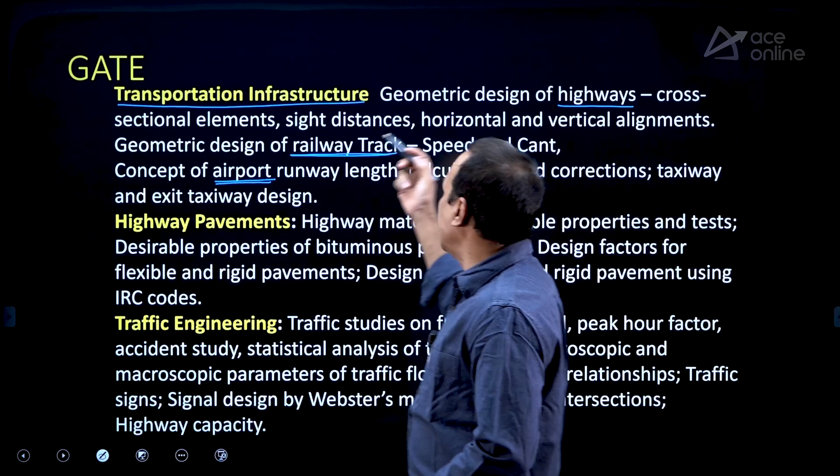For GATE, this is our syllabus. You have transportation infrastructure, mainly highways. This is highway geometric design, and along with it you have railway geometric design and airport geometric design. So the geometric design of highway, railway, and airport. After that, pavement design along with properties of highway material.

Next is traffic engineering. So totally you can say there are 3 parts.

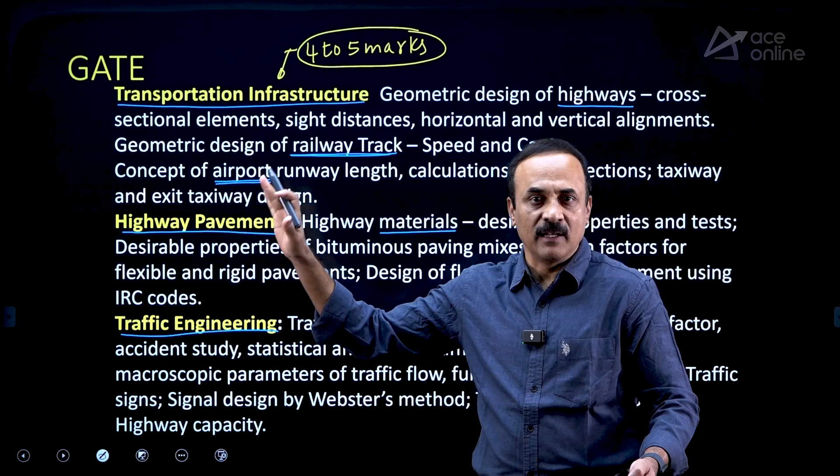There may be a chance of 4 to 5 marks from highway geometric design, including railway plus airport. Generally, if a question comes from railway, there is no chance of a question from airport, and if a question comes from airport, there is no chance of a question from railway, till now. In future, there may be a chance of a question from both railway and airport along with highway, but in railway and airport you only have the geometric design part, which is very simple, sweet and short. So no need to worry much about it.

Next, highway pavements will have a chance of 2 to 4 marks here.

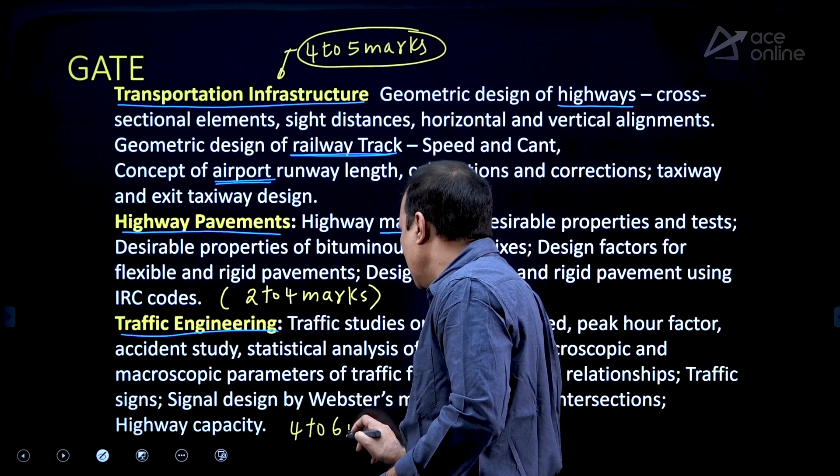Traffic engineering is having again 4 to 6 marks, sometimes it may go up to 6 also. Minimum is 4, you can go up to 6 marks also. So compared to geometric design, there is a slight higher weightage for traffic engineering.

Be careful about traffic engineering because it has a lot of miscellaneous theory things and empirical parameters also. You have to be very careful and cautious about traffic engineering, so spend more time on it. Highway geometric design is straightforward and formula oriented; if you know the formula and a little of the specifications, that is more than enough. So spend more time on traffic engineering first, then come back to highway geometric design including railway and airport, then come to pavement design and highway material.

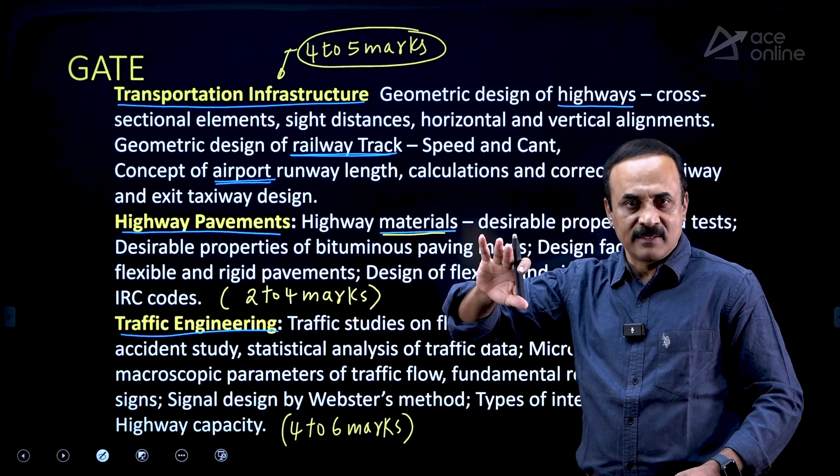In pavement design and highway material, there is less weightage, from 2 to 4 marks. Especially in highway material, you just need to go through material testing, especially aggregate testing and bitumen testing. If you remember the aim, apparatus, and specifications, that is more than enough. No need to go through the procedure of the experiments and all.

Now, coming to the type of questions, you all know there are multiple choice questions, MCQs. For MCQ, if there is a wrong answer, 1/3 is negative. For a 1 mark question, 1/3 is the negative mark. For a 2 marks question, 2 into 1/3, that is 2/3, is negative.

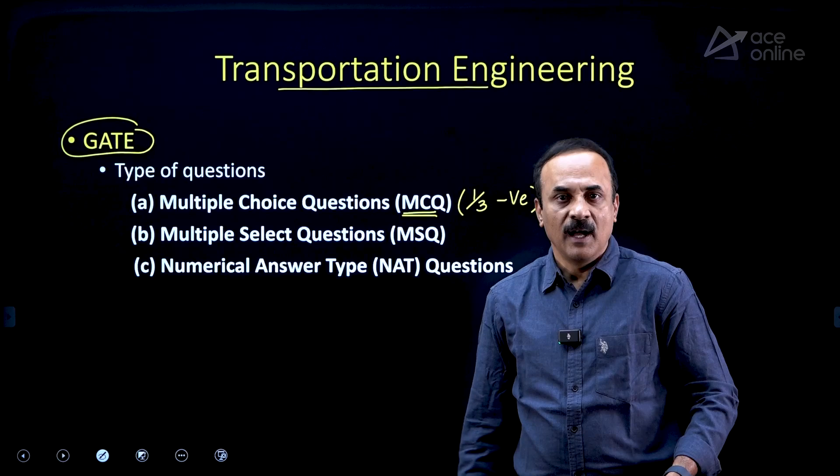Multiple select questions will also be there, very similar to multiple choice questions, but here more than one option may be correct. You can select more than one option among A, B, C, D. So there is no negative marking here. And for numerical answer type questions, you need to fill the answer in numerical form only, meaning there is no choice at all. You need to fill the answer as per their requirement.

Sometimes they will ask you to round it to the nearest integer, sometimes to 1 decimal place, 2 decimal places, and so on. But if there is answer variation, they will accept correctness within some range. There is no negative marking here, that is the advantage. So you must answer all the multiple select and numerical answer type questions.

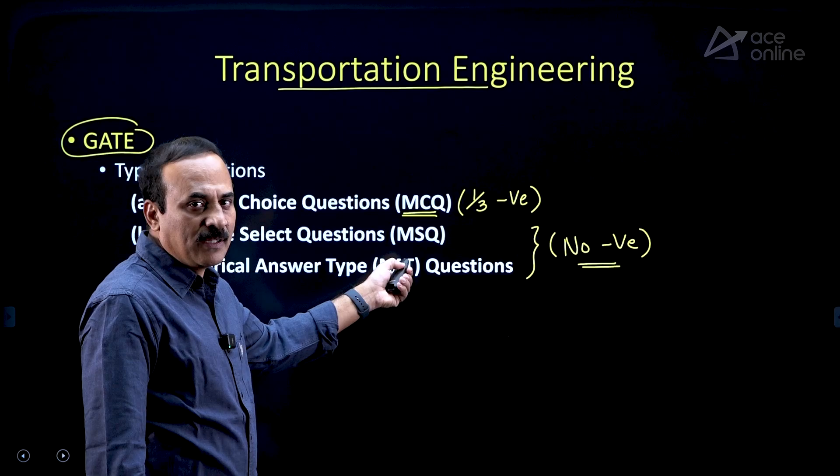Nowadays, the importance of multiple select questions is increasing. 3 years back there were no multiple select questions, but recently they have added multiple select questions in the GATE exam also. Usually, these are the types of questions we expect in the GATE exam.

Memory recall type questions, meaning based on formulas and specifications, as given by the GATE officials on the official website. That means there will be some memory oriented questions based upon formulas and specifications. So you must memorize and write the formulae along with the specifications, some specifications like what is the reaction time, what is the height of the driver above the road surface, like that.

Comprehensive ability to understand - if you understand the concept, they may give you theoretical questions or numerical aptitude type questions, because GATE is a graduate aptitude test. So few questions are based upon aptitude also. A person with good aptitude can answer the question without much difficulty. That type of question is a comprehensive question.

Application type - whatever theory or formula you have come across, you can apply that formula and get the answers. That may be a formula substitution type, and there may be analysis type questions also, where you need to analyze the question, think, and then answer.

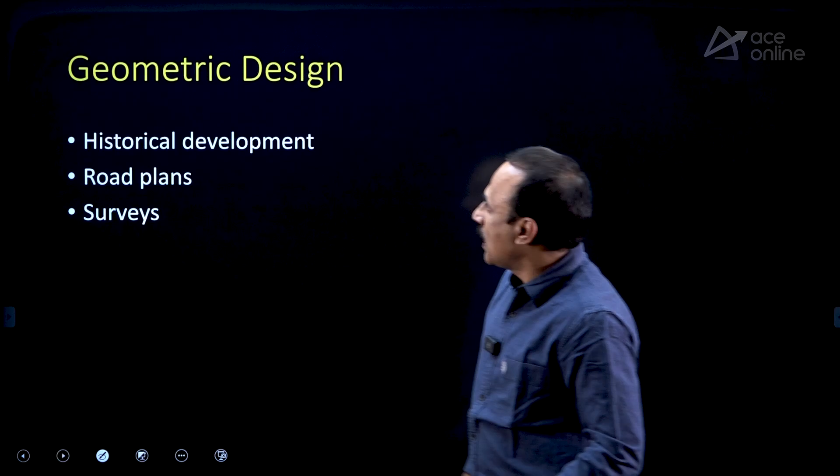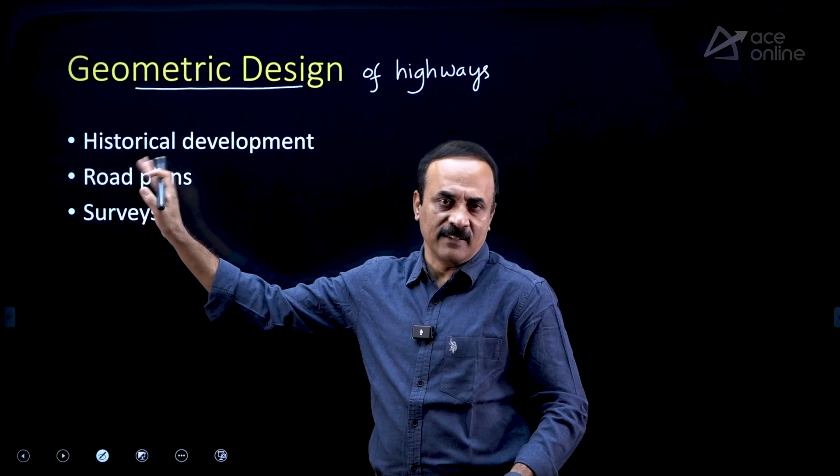Now come to geometric design. Geometric design includes geometric design of highways, historical development, road plans and surveys. I don't think questions will come from this area - you can directly ignore these, because history never repeats, and road plans and that type of old version material - nobody will ask you, since GATE is a graduate aptitude test.

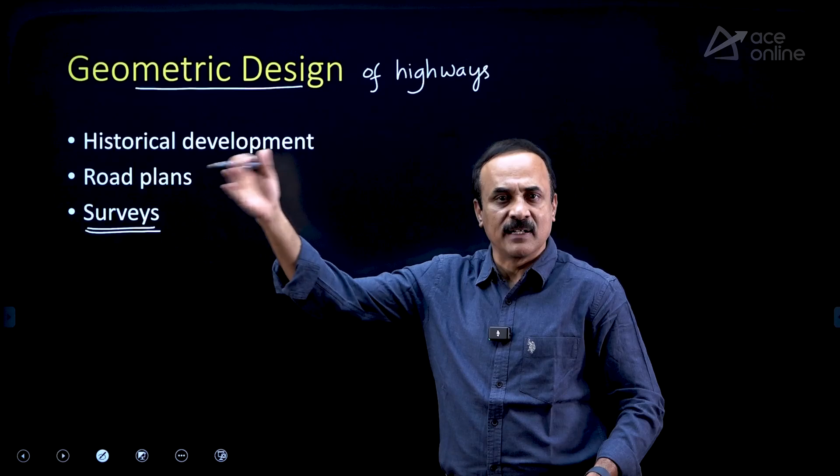Nobody will ask you all these things. But surveys you might have come across in the survey subject - that is more than enough. In survey, you might have come across surveys related to highways, surveys related to buildings, surveys related to canals. If you have a little idea there, that is more than enough.

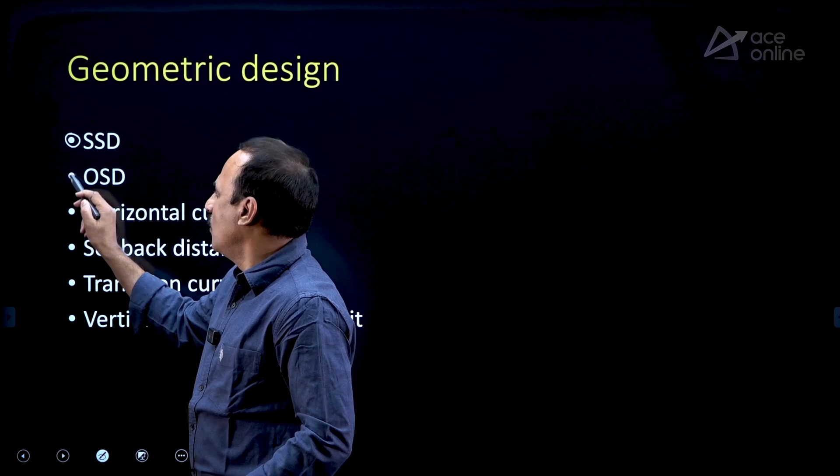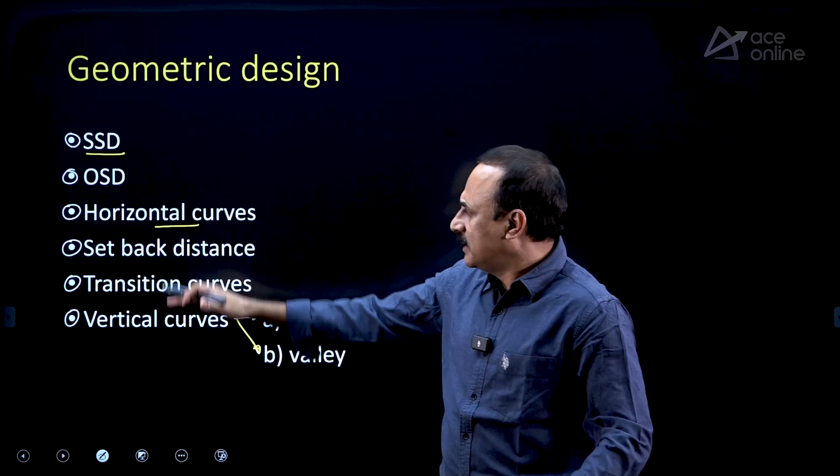Now coming to the main things of geometric design - you have stopping sight distance, overtaking sight distance, horizontal curves, setback, transition curves, vertical curves. In vertical curves there are 2 types - summit and valley. There's a scope of 4 to 5 marks from this. Stopping sight distance is important, overtaking is okay, horizontal curves is important. Other areas may have questions, but each chapter will have 3-4 formulae, sometimes 1 or 2. So do not neglect any part of this geometric design of highways topic - SSD, OSD, horizontal curve, setback distance, transition, vertical curves with summit and valley - that is enough.

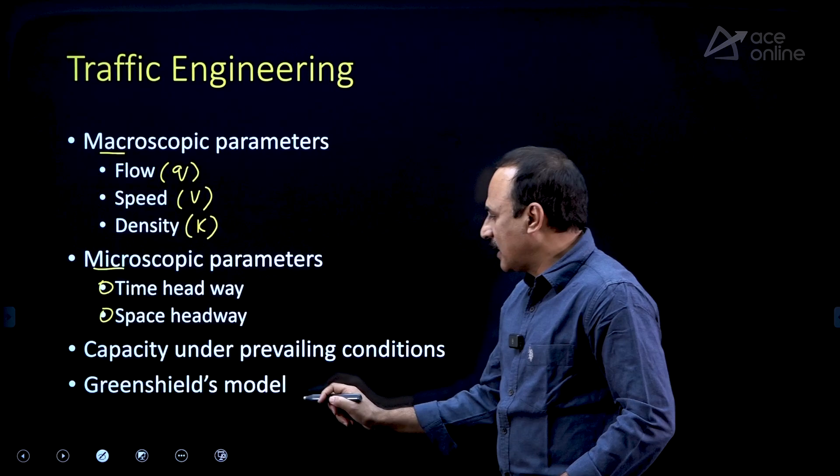Next is traffic engineering. We have macroscopic parameters like flow - nothing but traffic volume, speed and density - and the relation between these values is important, especially capacity calculation based on these values. Next is microscopic parameters like time headway, space headway. Micro means small, macro means big or large parameters. Capacity under prevailing conditions is important. Then the Greenshields method is very important - the Greenshields linear speed-density model - questions are repeatedly coming from Greenshields.

Next is speed and delay studies - I don't think questions will come from this, you can ignore it if you want. Point of conflicts is a theory, memory-oriented area. Then design of rotary intersection - rarely questions come. Highway lighting also very rare, parking also very rare, accidents also a rare area.

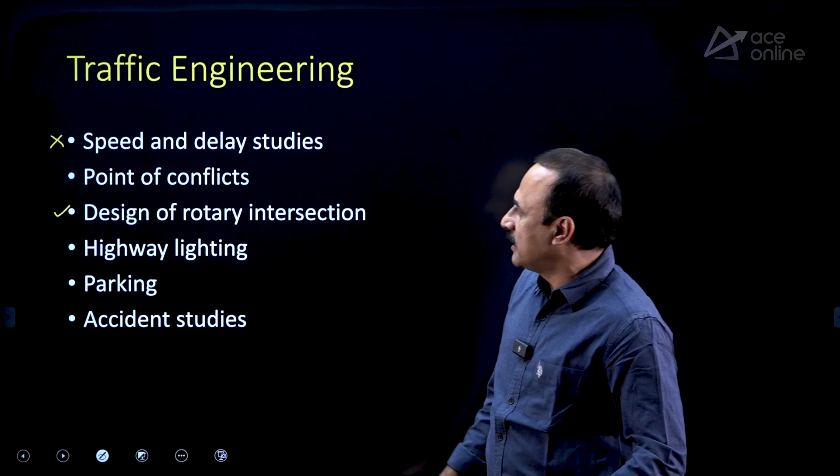So these are the important areas, other things are not that much important. In this area, design of rotary may come into the picture, and point of conflicts theory - try to remember that. Other things are rare to get in the exam.

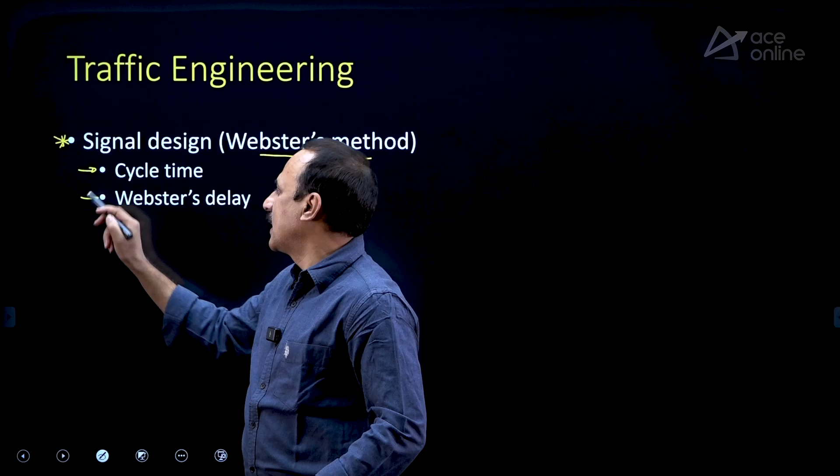Now next, signal design - Webster's method is very important, especially cycle time calculation and Webster's delay calculations. We will just talk about these things.

As per our limited time, we will just overview all the things.

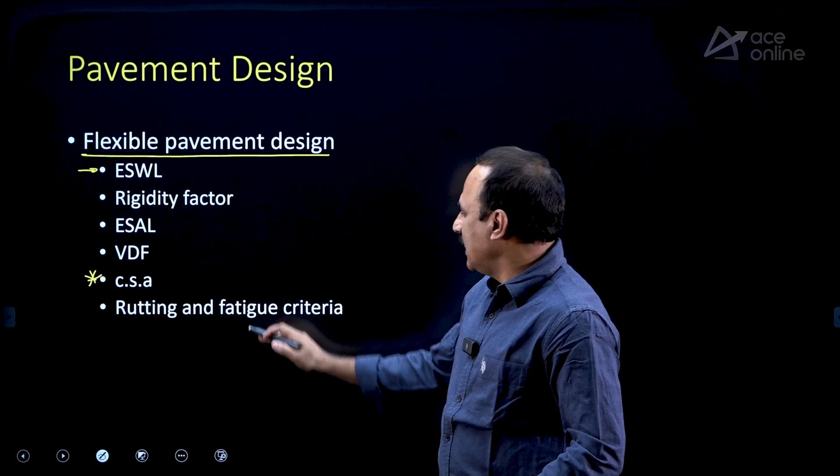Next, coming to pavement design, we have flexible pavement design. This includes calculation of equivalent single wheel loads, rigidity factor calculation, equivalent single axle load, vehicle damage factor, and cumulative standard axle calculation, which is very important for us. Next is rutting and fatigue criteria, which is a rare issue.

Next, rigid pavement design: we have wheel load stresses, warping stresses, and frictional stresses. Frictional stress calculation is important, and a critical combination of stress is important, especially in joints. We have longitudinal joint, expansion joints and contraction joints. Among these, dowel bar design and tie bar design are important. Go through these areas.

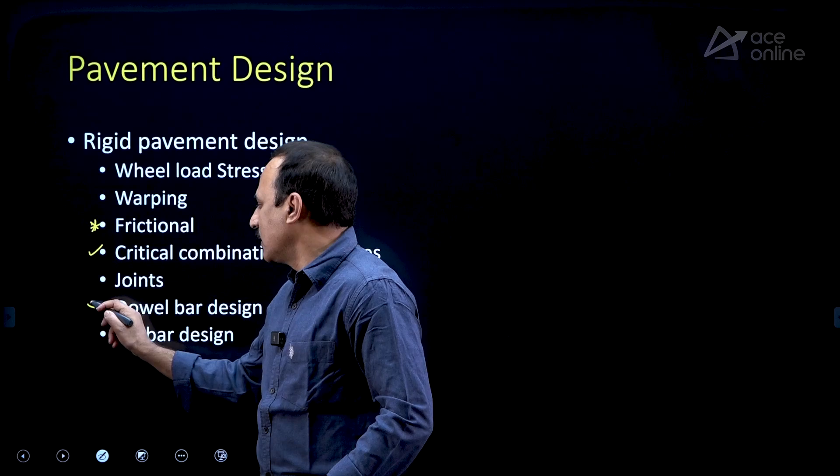Critical combination of stresses, go through this. Summer midday, winter midday, like that we have different combinations as per IRC. Try to remember as per IRC.

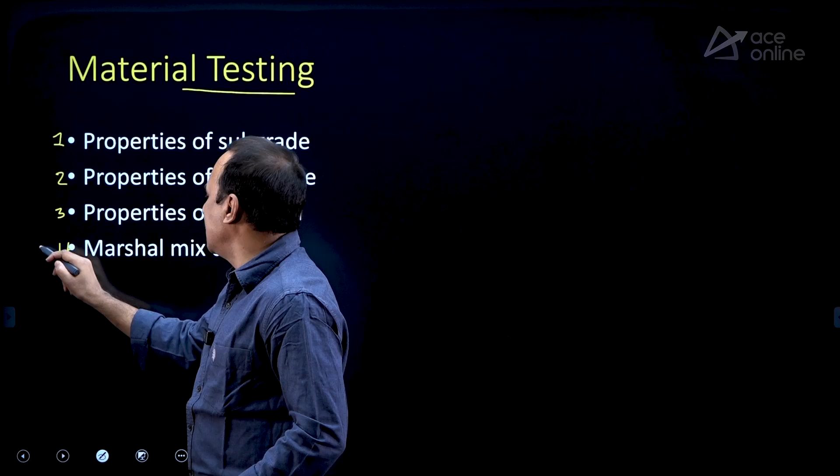Next is material testing. We have properties of subgrade, properties of aggregate, properties of bitumen, and Marshall mix design method, which is important for us. There is a chance of a 2 marks numerical question from Marshall bituminous concrete mix design.

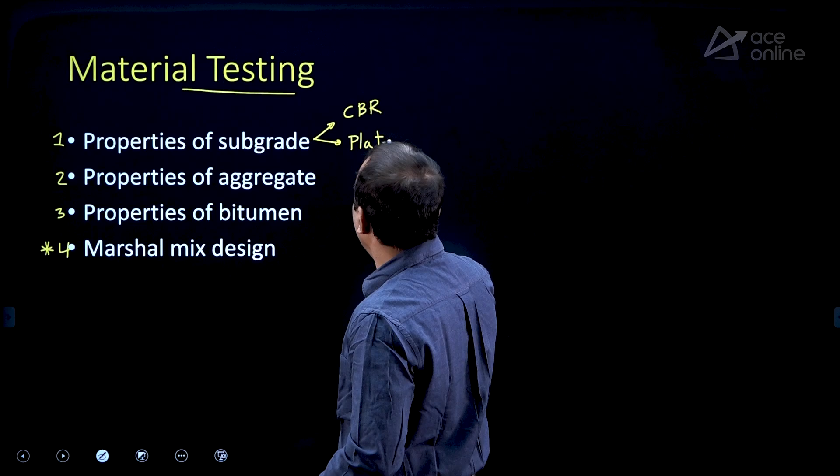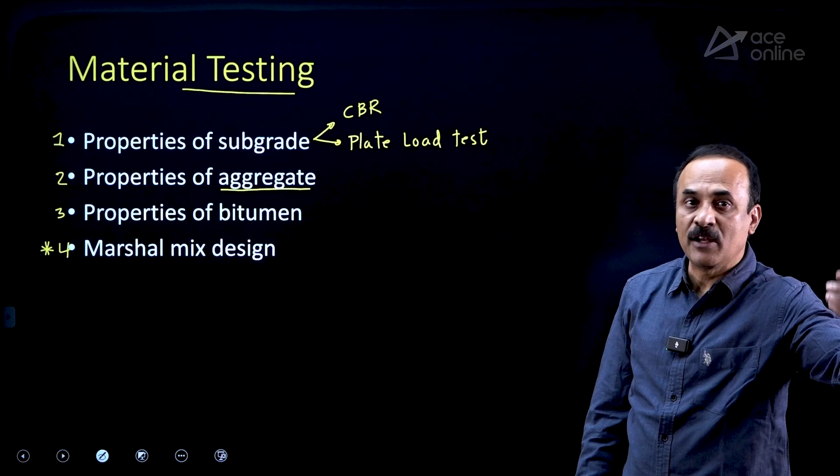Properties of subgrade includes CBR test and plate load test. Go through these: CBR test, plate load test, properties of aggregate and properties of bitumen. The properties of aggregate will be helpful in construction aggregate also. Especially, you might have come across in RCC where you have cement, aggregate and water. That aggregate and this aggregate, road aggregate and building aggregate, construction aggregate, are the same.

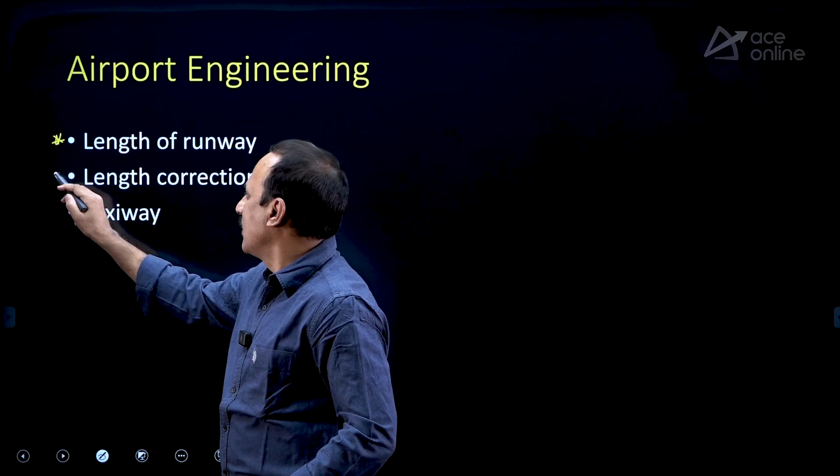Length of runway in airport, length of runway, length corrections, and the taxiway, especially the exit radius of taxiway, is important for us. Exit radius calculations are important from the exam point of view.

Now we will just touch the geometric design part. Gradient is slope along the length of the road; camber is slope across the length of the road. So there may be a chance of a question on grade compensation.

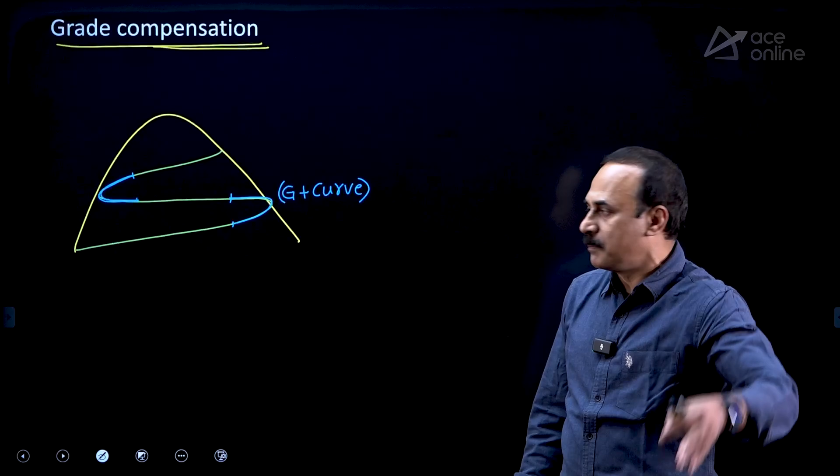Grade compensation is the reduction given to the gradient when a gradient comes along with a horizontal curve. If there is a gradient coming along with a horizontal curve, say suppose you are going on a hilly area on a straight road, but at some locations a gradient comes along with the horizontal curve. The road is going up and up and it is taking a turn. So you have gradient plus horizontal curve. If gradient is there plus curve is there, then heavy vehicles may not go up.

To facilitate heavy vehicles to go up easily, we reduce the gradient. That reduction given to the gradient is called grade compensation. Grade compensation in percentage is given by 30 plus R by R, or 75 by R, whichever is least. This is an empirical formula. R is equal to radius; you need to substitute R in meter only, don't substitute in any other units. The units are fixed.

And the compensated gradient is the gradient that you are providing on the road after grade compensation. This is nothing but the original gradient minus grade compensation. Compensated gradient is equal to the actual gradient on the road minus grade compensation.

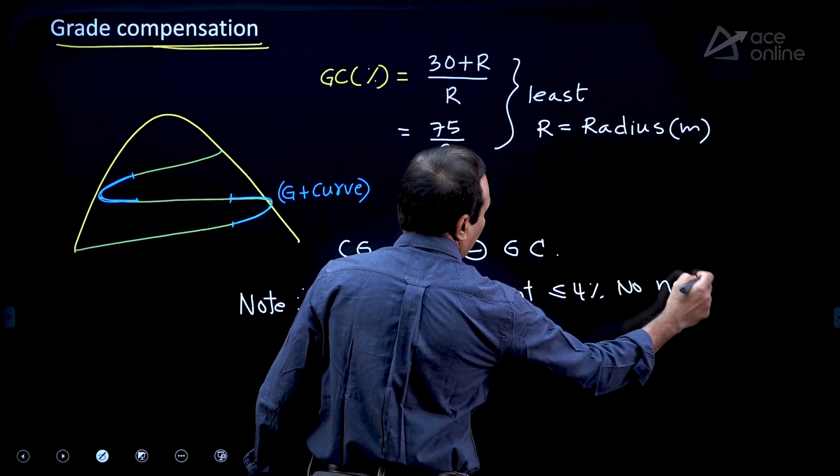And what IRC says is, if the gradient is less than or equal to 4%, there is no need of grade compensation. No need to give a discount to the gradient if the gradient is flatter than 4%. So you need to remember this formula and remember this point also.

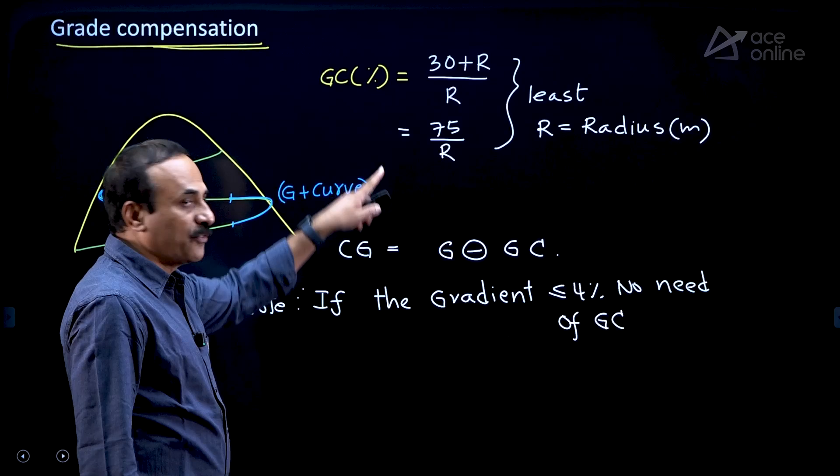We'll take a small numerical on this concept. Try this question: the gradient on a highway is 5%, and the highway encounters a horizontal curve of radius 500 meter. Which of the following statements are correct? Grade compensation is 0.15%. Compensated gradient is 4%. Grade compensation is 1%. Which of the following statements are correct? It is a multiple select question.

Try this question please. The gradient given is 5%, which is more than 4, so grade compensation is allowed. You can allow the grade compensation. What is the allowable grade compensation you can have here?

Allowable grade compensation means if 5 is the actual gradient, you can give discount till it becomes 4. So maximum grade compensation is 1%.

Allowable grade compensation or maximum grade compensation is 1%. You calculate grade compensation as per our formula, 30 plus R by R

and 75 by R, whichever is less. As the radius is 500 meter, 30 plus 500, that is 530 by 500. And here it is 75 by 500. This will be the least.

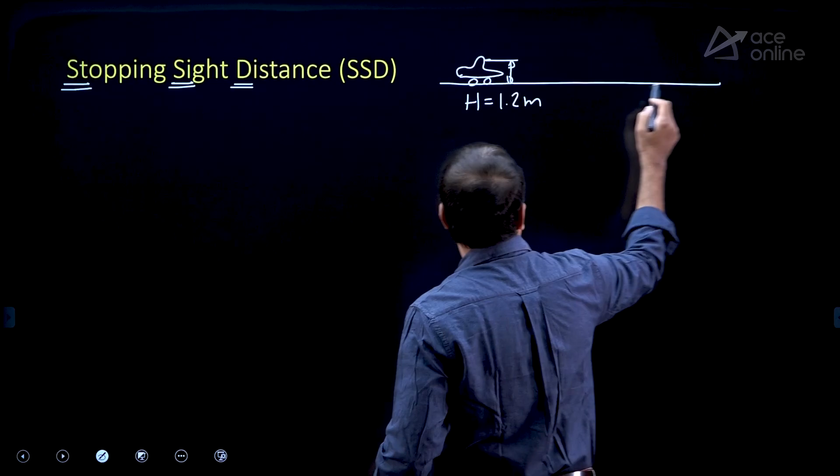The height of the driver from the road surface, we call it capital H. As per IRC, it is 1.2 meter. Minimum height of the obstruction above the road surface is 0.15 meter as per IRC. So capital H, height of the driver above the road surface, is 1.2 meter, 4 feet. Height of the obstruction over the road surface is 0.15 meter, half a feet.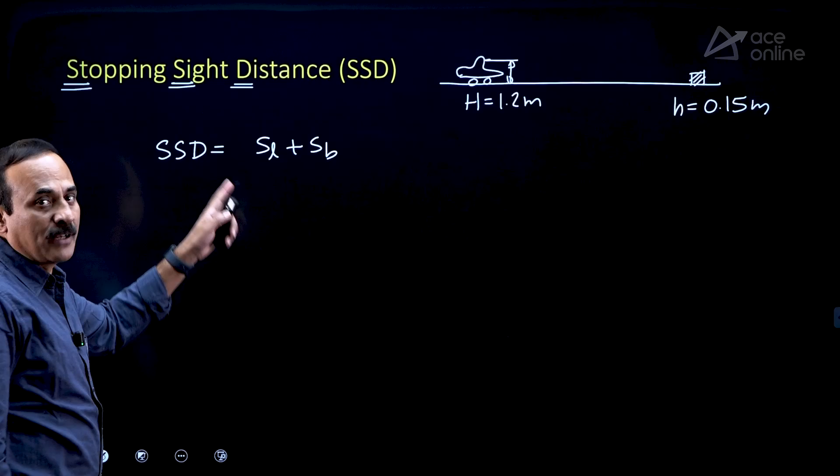So with this condition, the minimum distance required to stop the vehicle comprises lag distance plus braking distance. First, driver has to react that I should apply brake. The distance travelled by the vehicle during reaction time of driver is lag distance, and after the application of brake, vehicle moves for some distance and stops. That distance is called brake distance. Lag distance is V into T, brake distance is V square by 2GF.

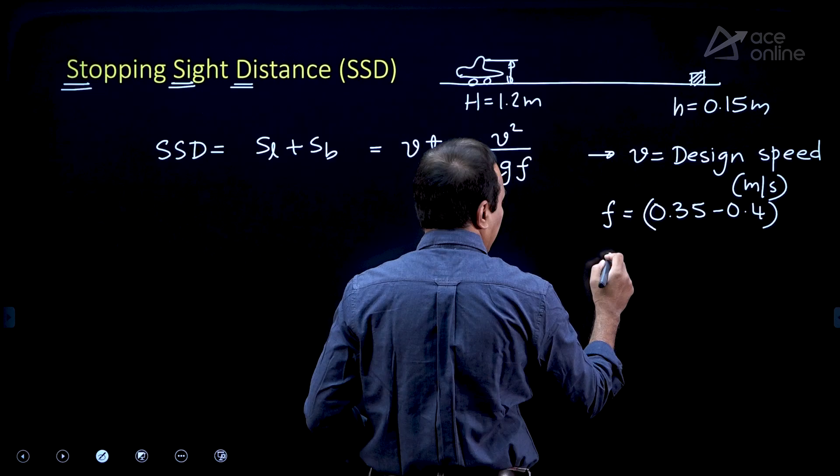Learn this by heart. V is design speed here in meter per second. Design speed in meter per second. And F is equal to coefficient of longitudinal friction, ranging from 0.35 to 0.4 as per IRC. As the speed increases, friction reduces. Coefficient of longitudinal friction, this is longitudinal friction.

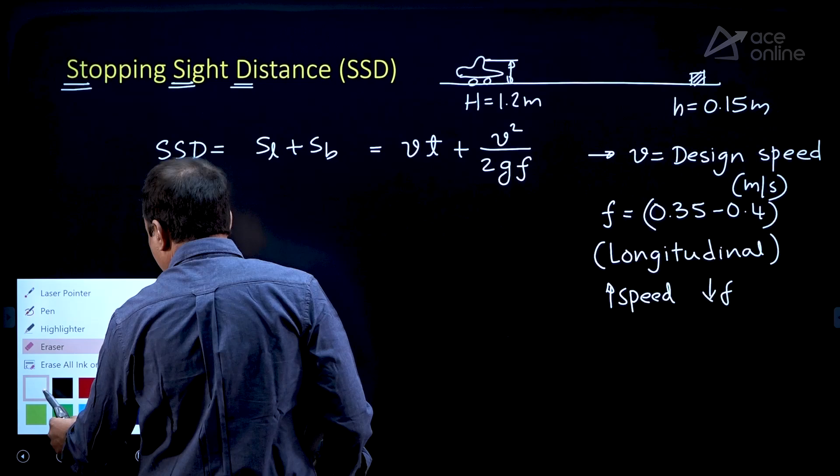More the speed, friction reduces, till the speed is 80 kmph. After 80 kmph, that means further increase in speed beyond 80 kmph, the friction remains constant. Speed increases, friction reduces up to 80 kmph. Beyond that, F remains constant.

0.35. Beyond speeds of 80, say for example 81, 83, 90, 100, 120, the friction remains 0.35. At slow speeds, the friction is 0.4. As speed increases, it reduces to 0.35. By the time speed is 80, it is 0.35. Beyond 80 kmph, at 80, 90, 100, 120, the friction remains 0.35 only.

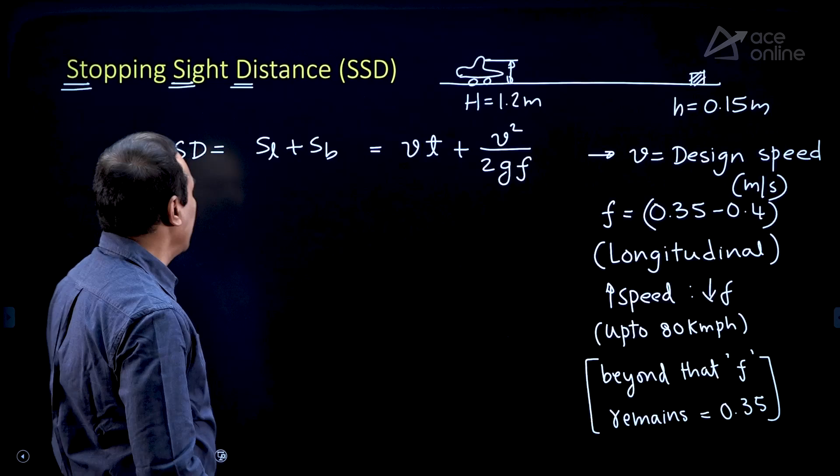So I am giving you this equation for a flat road. This is for flat road.

If the road is having gradient, plus brakes are not proper, the roads are not flat roads and brakes are not good. In that case, stopping sight distance can have no change in lag distance, but brake distance changes to V square by 2G eta f plus or minus gradient as a ratio.

Try to remember this. Eta is called brake efficiency, and G is called gradient. Both you need to substitute as a ratio. Brake efficiency you put as a ratio, gradient also you put as a ratio.

Plus indicates upward gradient, negative indicates downward gradient. Upward gradient is taken as plus, downward gradient is taken as minus. If brakes are 100% perfect, no loss at the brake, eta is 1. Perfect brakes, eta is 1. Flat road, gradient is 0.

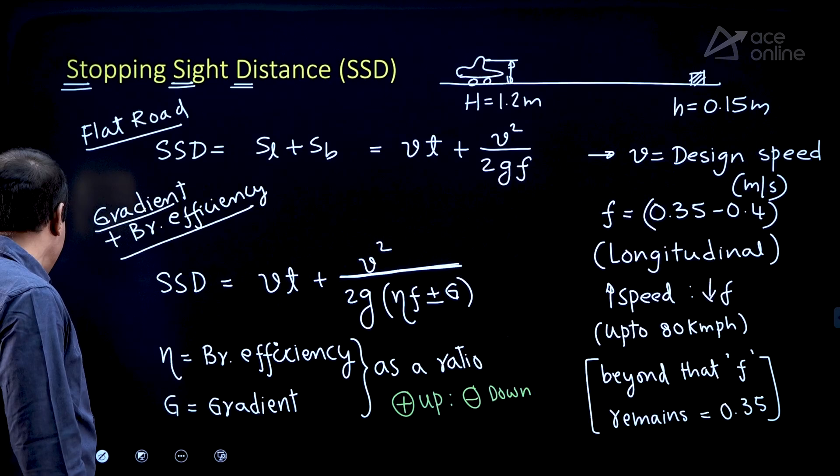If the road is very flat, gradient is 0. Perfect braking system, new vehicle, brand new vehicle brought from the showroom, eta is 1. If nothing is mentioned, take eta as 1. If nothing is mentioned, take gradient also as 0. Now, people may ask you safe SSD sometimes.

Safe SSD depends upon the number of lanes on the road and direction of traffic, especially in single lane two-way roads. This is very important. A single lane two-way road is 3.75 meters wide, with opposite vehicles also coming. In that case, you should stop and the opposite vehicle should also stop to avoid accident. So safe SSD will be 2 into SSD, because there is no chance to go onto the shoulder sometimes, as the shoulder might be damaged.

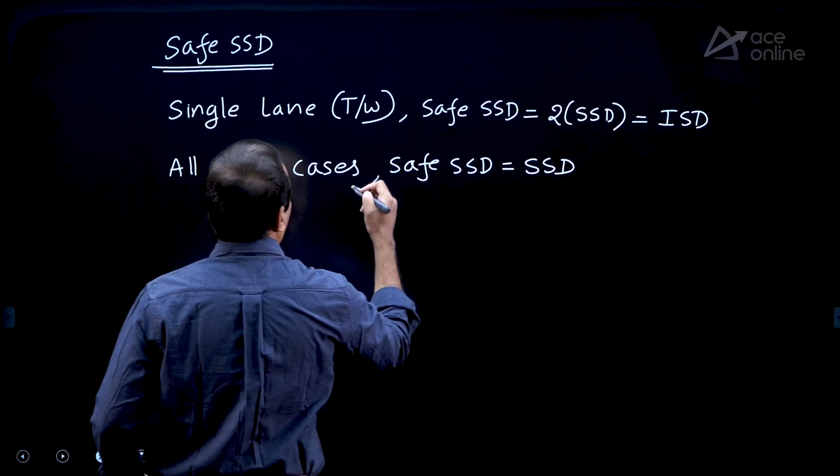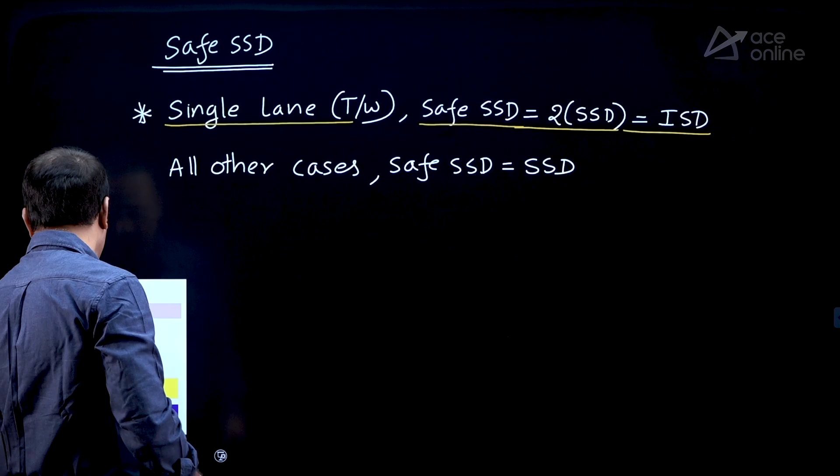So you can't use the shoulder for moving vehicles; shoulder is used for emergency parking. In that case, safe SSD is 2 into SSD, which we call intermediate sight distance. All other roads, any other case, safe SSD will be directly SSD calculated by the formula only. Try to remember this: single lane two-way road, safe SSD is 2 into SSD, that is ISD. In any other case - single lane one-way road, two lane two-way road, or any other road - safe SSD is SSD calculated from the formula directly. So intermediate carriageway, intermediate sight distance, is equal to twice the stopping sight distance.

You need to remember the relation between F and G - coefficient of longitudinal friction and retardation. A is retardation, so A is equal to F into G. A is retardation, F is the coefficient of longitudinal friction.

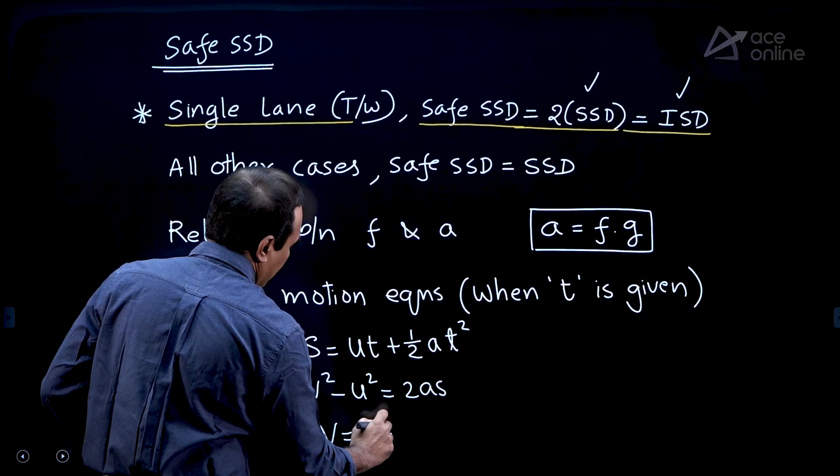You need to use linear motion equations when time of travel is given in a question. Linear motion equations are to be used when time of travel is given. You might be knowing these equations: S is equal to ut plus half at square, v square minus u square is equal to 2as, v is equal to u plus at. You might have come across these in your first year of intermediate or 11th class.

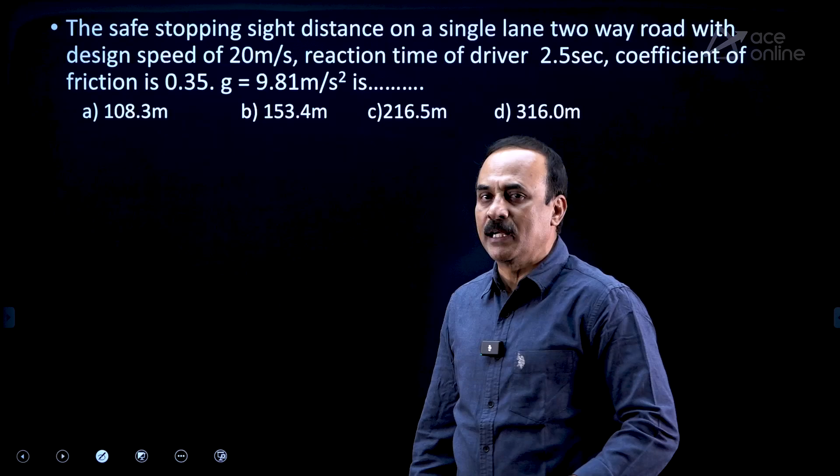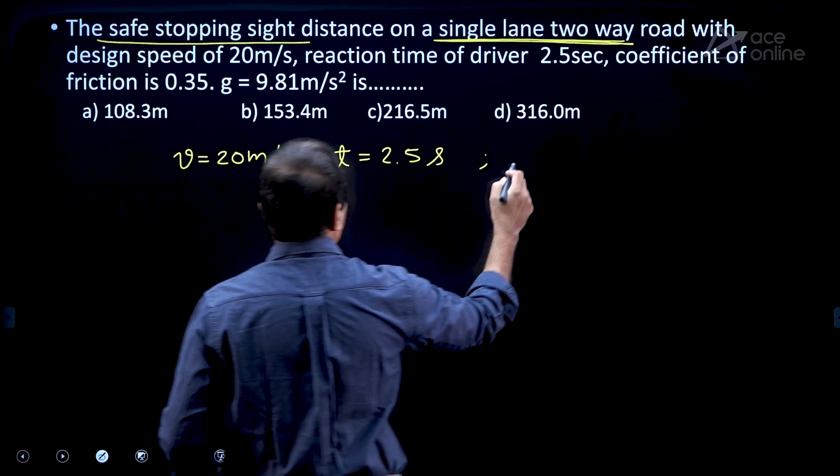Try to solve this question. If the speed is given in meters per second, you can use it directly. Otherwise, if speed is given in kmph, convert to meters per second by multiplying by 5 by 18. The safe stopping sight distance, safe SSD, is asked on a single lane two-way road - this is most crucial. Design speed is given as 20 meters per second. Reaction time of driver is 2.5 seconds. Coefficient of friction is given as 0.35 - whatever is given, you take it. G is 9.81 meters per second square.

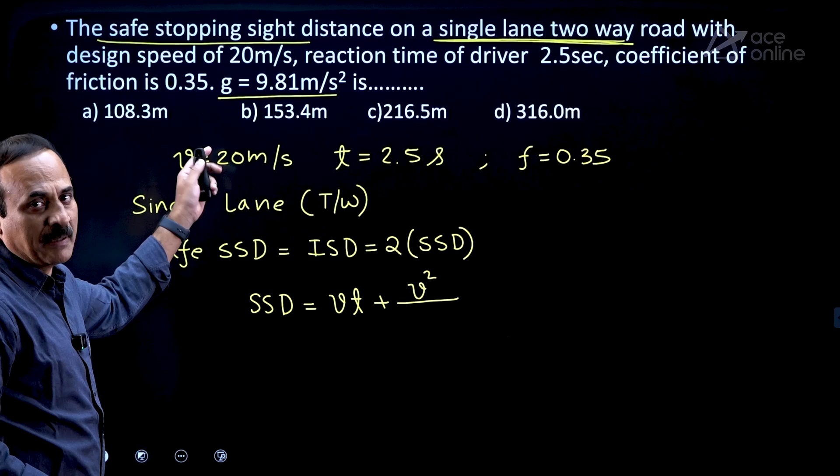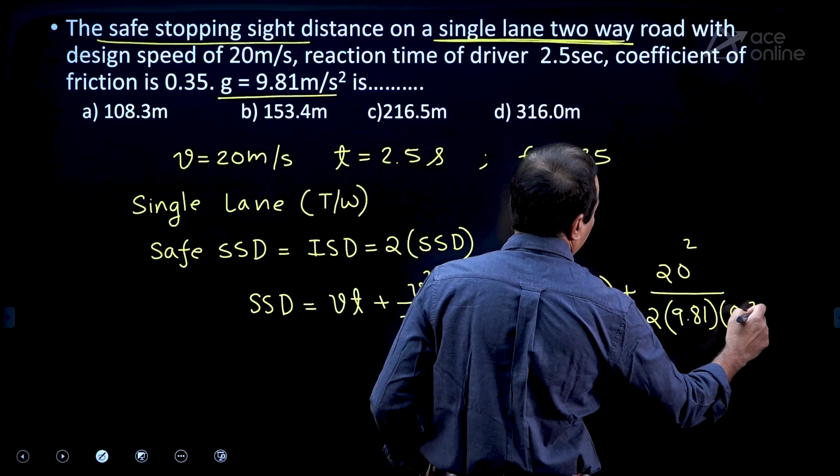Try to use the given values. So it is a single lane two-way road. Safe SSD here is ISD, nothing but 2 into SSD. SSD can be taken as lag distance plus braking distance. In braking distance, brakes are perfect because brake efficiency is not given and gradient also not given. So it is V square by 2G into F. Directly substitute, as V is given in meters per second, substitute meters per second. T is reaction time of driver in SSD, which is 2.5, given to you. Use the given values: V square, 2 into G is 9.81, F is 0.35. So 216.5 is option C.

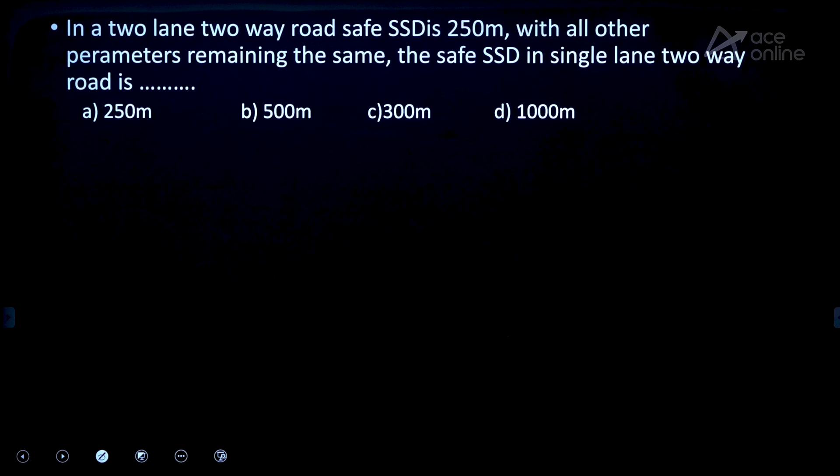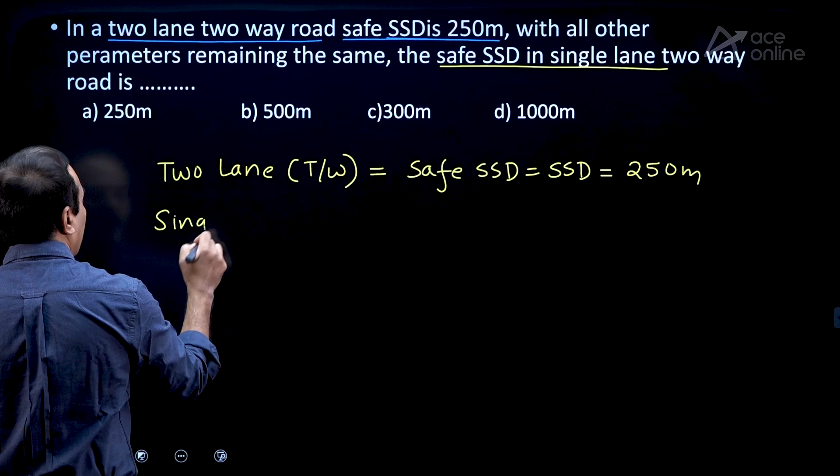Try this question. Two-lane two-way road, safe SSD is 250 meters, with all other parameters remaining the same. Safe SSD in single lane two-way road is asked. For two-lane two-way road, safe SSD is nothing but SSD only, so SSD directly is 250 meters. Then safe SSD on single lane two-way is asked - this is the most crucial part. Safe SSD is ISD actually, nothing but 2 into SSD. Already SSD is known to us, 250 into 2 is 500 meters. So the answer is option B.

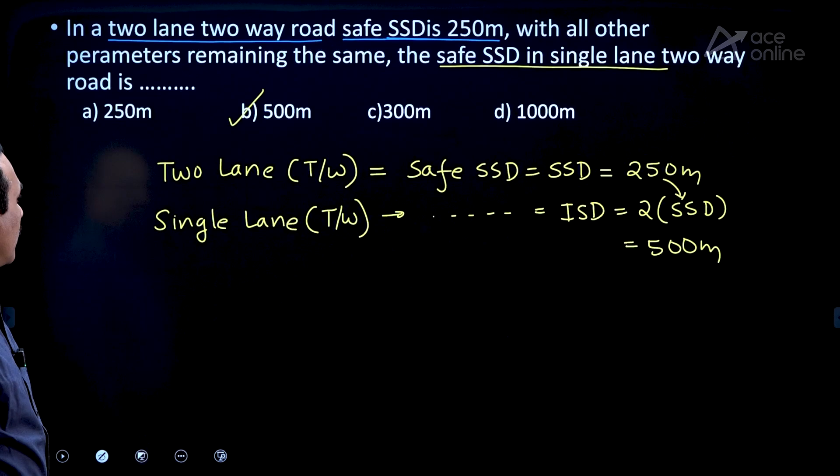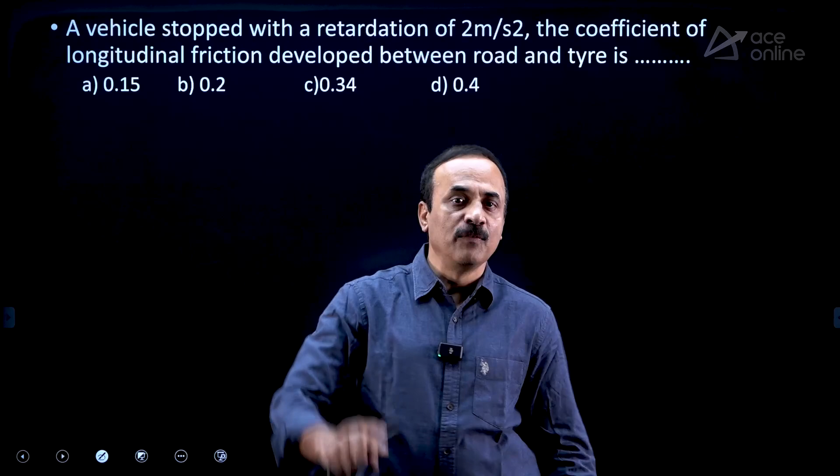Okay, like that, questions may come for 1 mark. The most critical area is single lane two-way, where safe SSD is 2 into SSD calculated by the formula.

Try this question: a vehicle stopped with a retardation of 2 meters per second square. Retardation is negative acceleration. Find the coefficient of longitudinal friction developed between road and tire - what may be the friction? Take the modulus, A is equal to F into G, that is what I told you. F is A by G, 2 by 9.81. Nearest answer, 2/10 you take it, point 2 - nearest answer is 0.2.

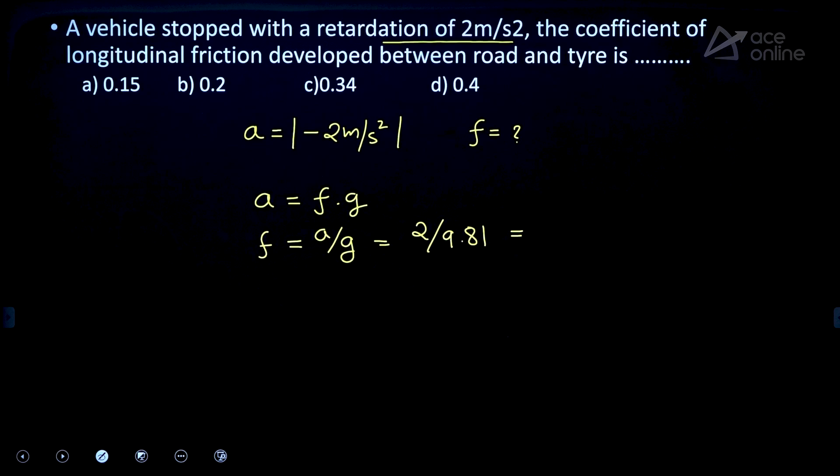One mark question generally comes like this.

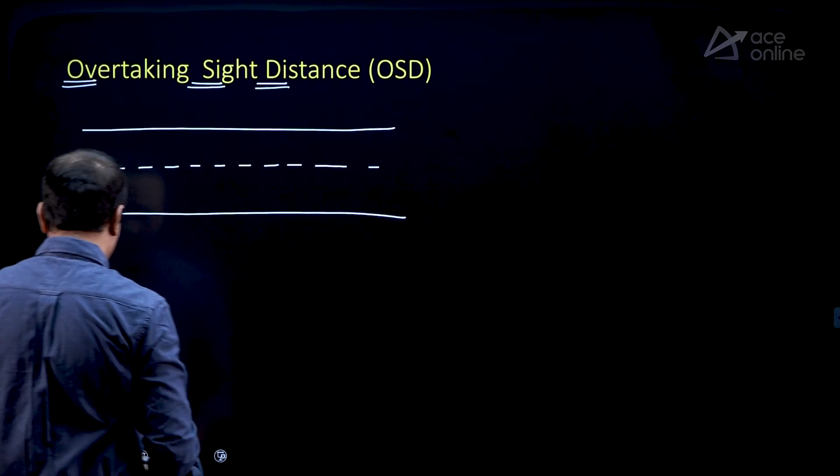We will talk about overtaking sight distance - the visible distance ahead of the driver required to safely overtake a slow vehicle. Overtaking is not allowed on single lane roads, because on a single lane road you can manage only one vehicle. So this requires a 2-lane road, minimum 2 lanes are required. Say suppose you are going by an Audi car and following a slow vehicle, a Benz lorry. Initially the Audi car driver has to follow the bench lorry at a slow speed, and has to wait for an opportunity to overtake this bench lorry.

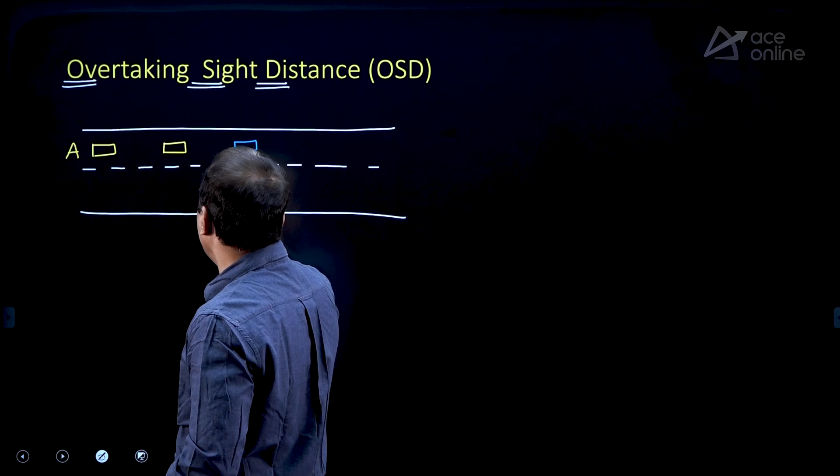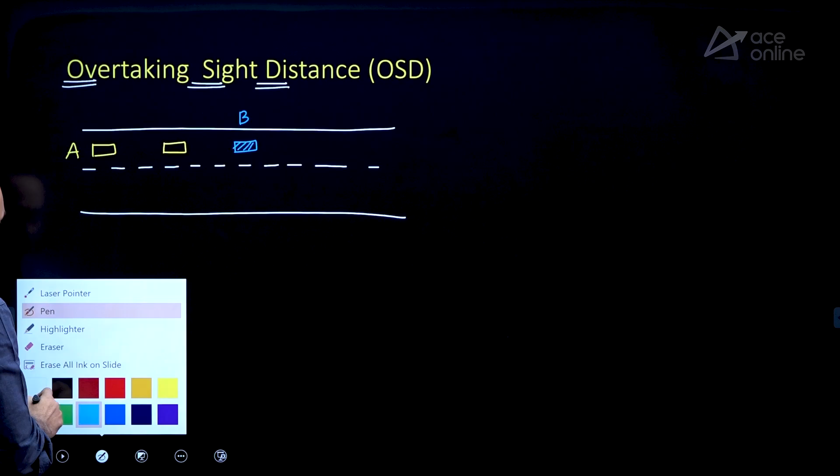So, initially the Audi car driver is following the Benz. I am taking all center to center distances. So, this is the distance travelled by the Audi car during the reaction time of the driver.

So, in this distance, the driver of the Audi car is moving with slow vehicle speed Vb. The Benz continuously moves with slow speed only, Vb. So, at this particular point, the Audi car driver moves on to the next lane. At this particular point, he observes some other vehicle coming from the opposite direction.

A Creta car is coming from the opposite direction. The Creta car is coming with a design speed from the opposite direction.

So, the driver of the Audi car identified that the Creta car is very far away. He has moved back to the original position, original lane, with increasing speed. So, during this path, the blue path, the driver of the Audi car is increasing the speed.

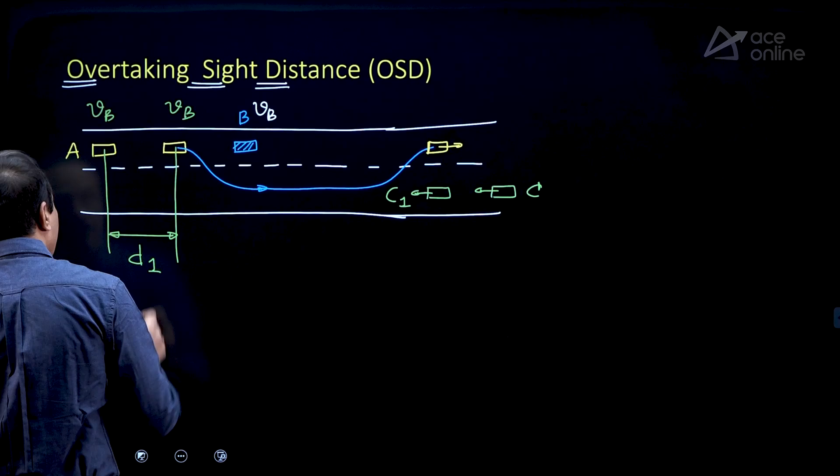So, the Creta car meanwhile has come up to here, going beyond that is dangerous. So, it has come up to here, say it has come from C to C1, and the Audi car initially during the reaction time of the driver has moved from A to A1, and then finally it has reached A2.

The Benz lorry during the overtaking time of the Audi car has moved from B to B1. It is moving like this. The Creta is coming from the opposite direction. The Audi car is moving forward like this.

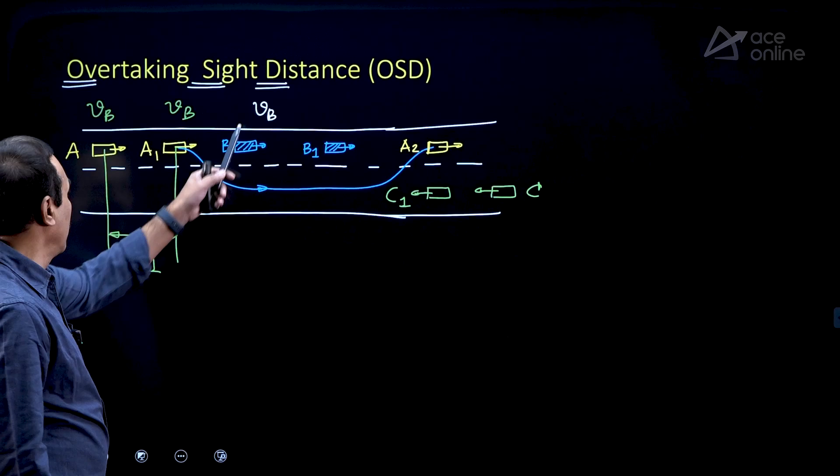So, this is the distance travelled by the bench lorry during overtaking time of capital T with a slow speed Vb. Overtaking time is capital T, reaction time is small t. The distance between the Audi car and bench lorry before overtaking is S1.

The distance between the Audi car and bench lorry after overtaking is S2. I am taking all center to center distances. So, the distance moved by the Creta coming from the opposite direction during the overtaking time, I call it D3, and the distance moved by the Audi car with acceleration is D2. So, the overall overtaking sight distance is D1 plus D2 plus D3.

For safe overtaking, in front of the driver, OSD is required, which is the sum of D1 plus D2 plus D3.

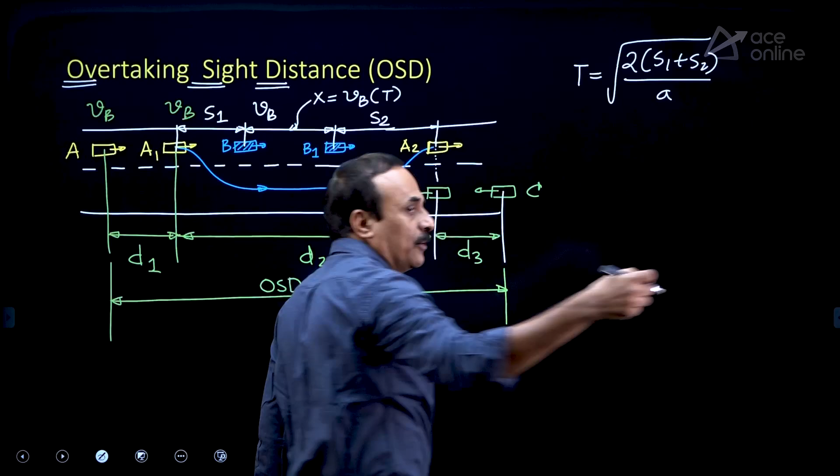Actually, the overtaking time capital T, I am not giving you the derivation, it is 2 into (S1 plus S2) by A, under root. For the derivation, you just go through the class notes. S1 is the distance between the Audi car and bench lorry before overtaking. S2 is the distance between the Audi car and bench lorry after overtaking.

If S1 and S2 are not given, use S1 equal to S2 equal to 0.7 into speed of the bench plus length of the vehicle. Average length of rigid wheelbase or average length of vehicle is taken as 6.1 meter. L is the average length of vehicle or average length of rigid wheelbase. As per IRC, we take it as 6.1 meter.

So, if not given, use this formula for calculation of S1 and S2. If not given, only use this. If given, take the given values.

Next, if you observe this data, D1 is equal to Vb into reaction time of driver in OSD. Initially, the Audi car is following the bench lorry with slow speed Vb. That is why Vb into T is D1. That is the distance travelled by the Audi car during the reaction time of the driver. T is the reaction time of driver in OSD.

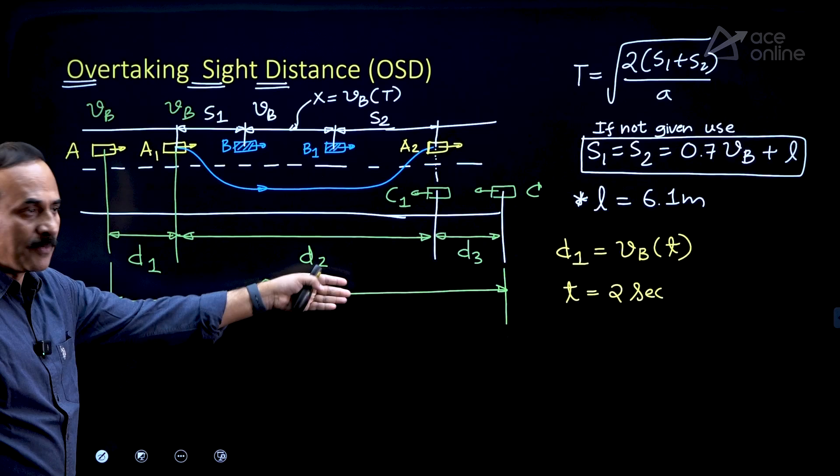It is not 2.5 seconds. 2.5 seconds is in SSD. 2 seconds is in OSD.

Now, D2 from the figure is S1 plus S2 plus Vb into capital T.

D3 is the distance moved by the Creta, which is moving with the design speed V. The Creta speed is V. It has moved a distance of D3 during overtaking time capital T. So, it is V into capital T.

So, if you remember these formulae, you can easily calculate the OSD. For the derivation and all, you need to go through the regular class notes, or otherwise it is there in any of the standard books. The derivation and all you can go through after the exam, or if you want some clarity you can go through that if you find time. Otherwise, directly memorize the formula and try to use it.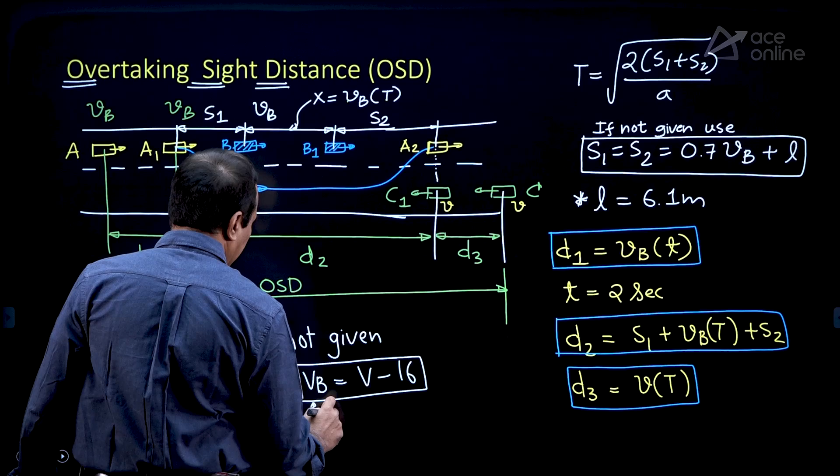If not given, velocity of the slow vehicle will be design speed minus speed 16. Try to remember it. These are all given in kmph. Capital V is generally given in kmph. Small v will be in meter per second. So, velocity of the slow vehicle is design speed minus speed 16. If Vb is not given, we use it.

Okay, this is overtaking sight distance in brief. Sometimes they will ask you safe overtaking sight distance, like a safe SSD we have taken previously. Safe OSD depends upon number of lanes and direction of traffic.

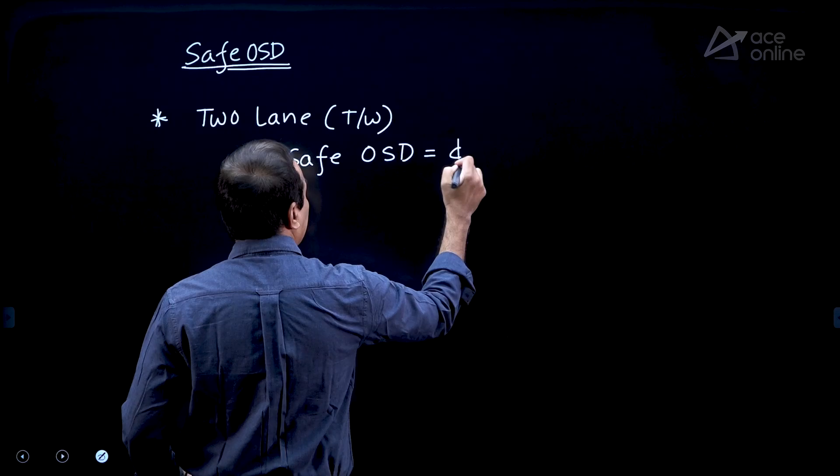Very critical is 2-lane, 2-way road. 2-lane road with 2-way traffic. Because in 2-lane, 2-way traffic, the opposite vehicle will also be coming, that also needs to be considered. So, in this case, safe OSD will be...

You need to consider D1 plus D2, and the opposite vehicle D3 also needs to be considered. In any other case, safe OSD is given differently - the opposite vehicle is not a problem at all in other cases, so D1 plus D2 only we use. Single lane roads overtaking is not allowed, that is why we use...

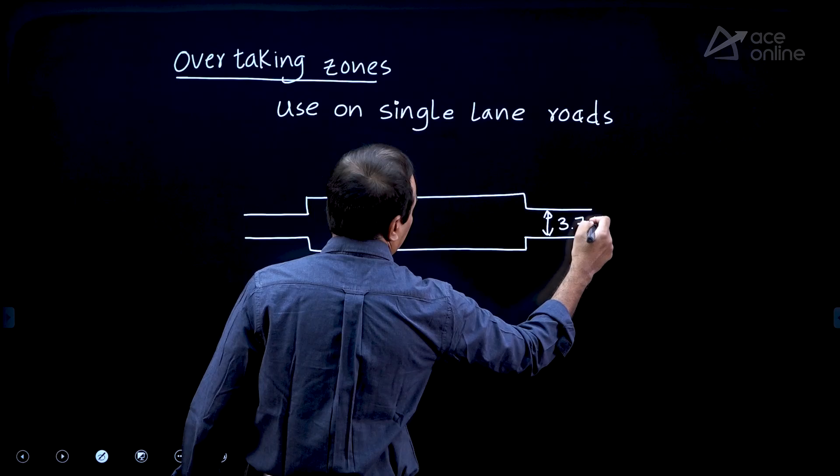Overtaking zones are used on single lane roads for overtaking purpose. That overtaking zone is nothing but a widened portion of the road for some length, only to facilitate the overtaking process. Single lane road width is 3.75 meter. In that 3.75 meter of width, overtaking is not allowed. So, in the overtaking zone, they will make the road into a double lane road.

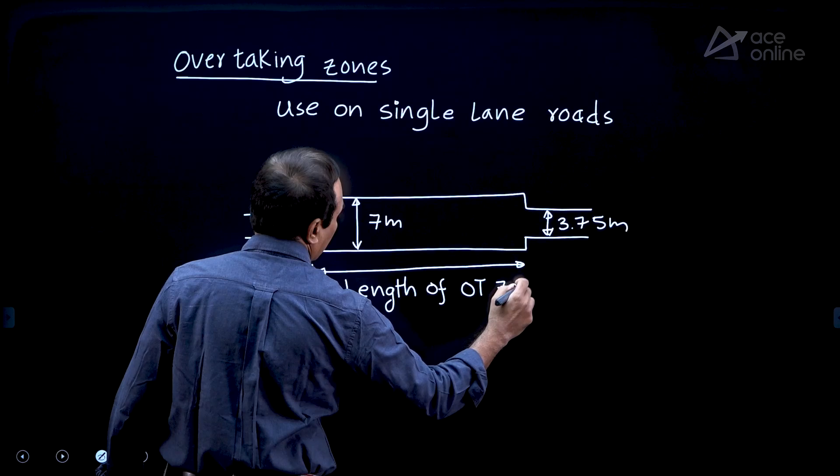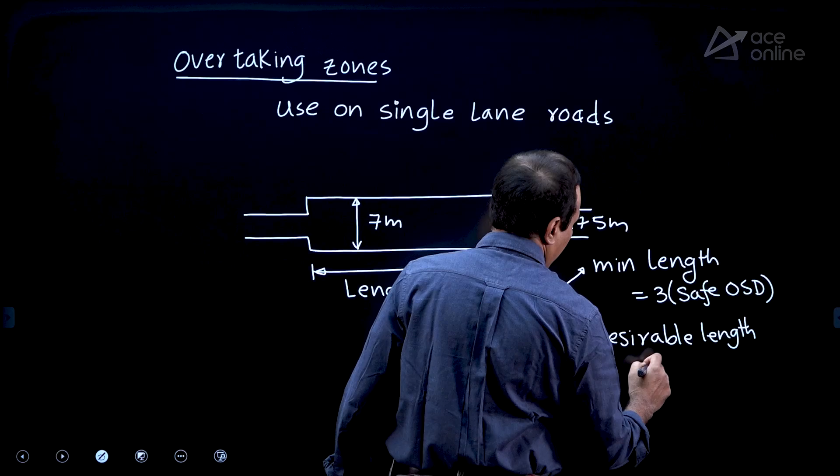So this is the length of overtaking zone. Minimum length of overtaking zone - length of OT zone I am writing, overtaking zone - minimum length required is 3 times of safe OSD. Desirable length is 5 times of safe OSD. So, minimum length of overtaking zone is 3 times of safe OSD, desirable is 5 times of safe OSD.

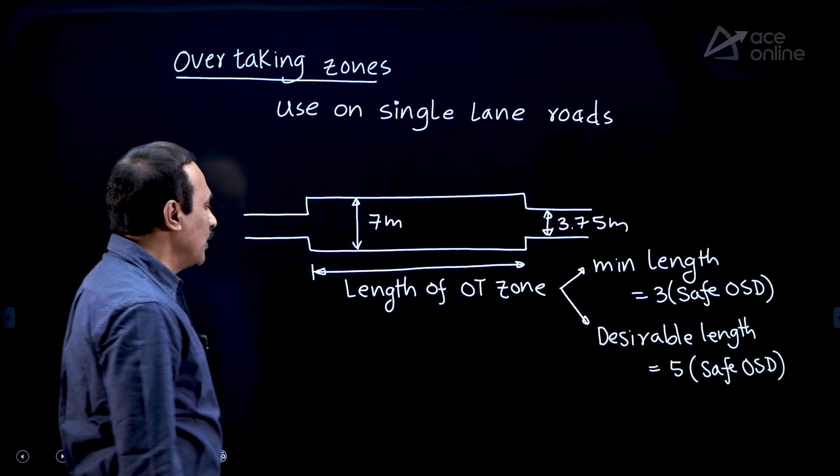And here the safe OSD is based upon the width available at the overtaking zone. Actually, width available at this overtaking zone is a 2-lane road width, 7 meter will be available. So, if you apply two-way traffic here, safe OSD is D1 plus D2 plus D3. If you consider only one-way traffic here, the safe OSD is D1 plus D2 only. D3 will not come in case of one-way road.

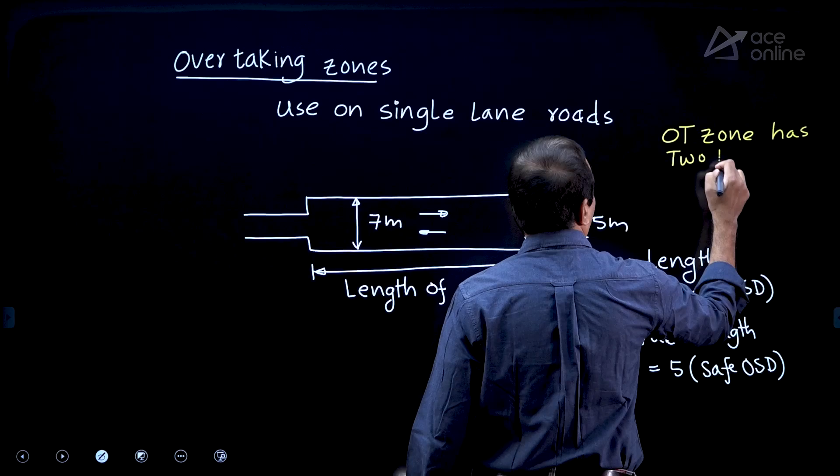So safe OSD based upon OT zone is 2 lanes. Generally, OT zone has 2 lanes. If it is one way, 2 lane one way, safe OSD is D1 plus D2 only. If it is 2 lane 2 way, if you allow 2 way here, safe OSD is D1 plus D2 plus D3. If opposite vehicle is allowed, D1 plus D2 plus D3 is required. If only one way traffic is allowed at the overtaking zone, D1 plus D2 is enough.

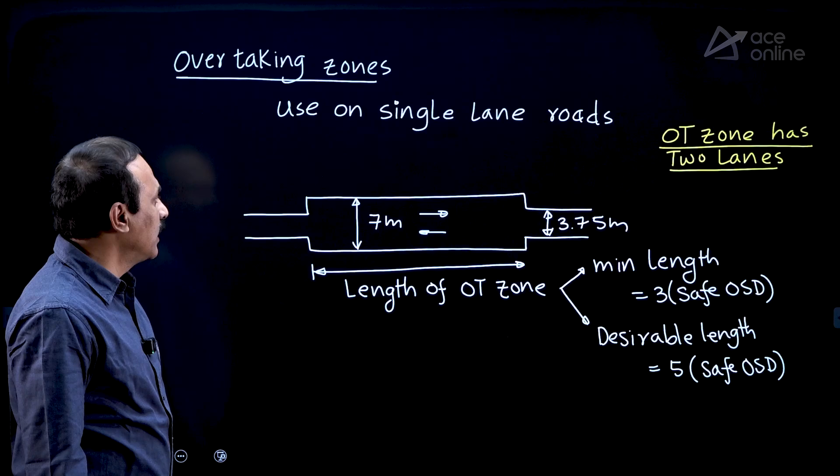Try this question - a 1 mark question, give me the answer, multiple choice question. Any doubts please?

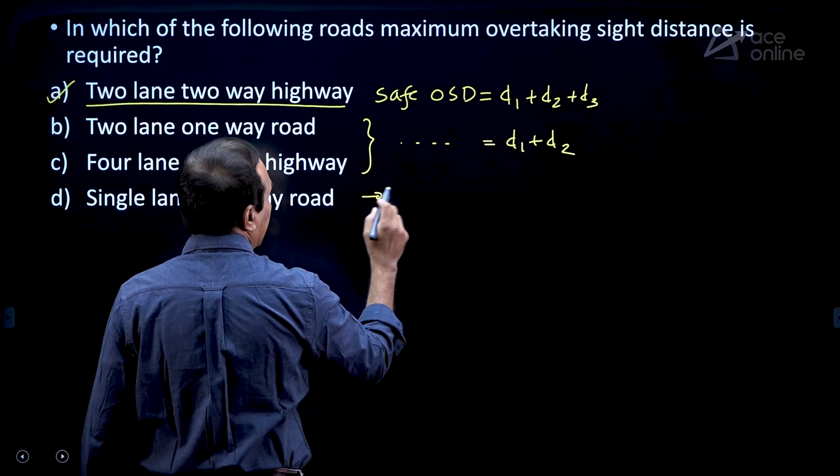In which of the following roads is maximum overtaking sight distance required? Maximum means in which case the opposite vehicle is also to be considered, D3 is also to be considered. Two lane two way, you require safe OSD as D1 plus D2 plus D3 also required. 2 lane one way, 4 lane divided highway - here safe OSD is D1 plus D2 only. Single lane one way road, overtaking is not allowed, unless otherwise you have an overtaking zone. The overtaking zone is not a single lane road, it is a widened 2 lane road. So, answer is option A.

Try this question - it is a numerical answer type question, needs time to solve. On a 2 lane two-way highway, two-lane two-way means the opposite vehicle is also coming into the picture. D1 plus D2 plus D3 also to be considered.

Acceleration of overtaking vehicle is 1 meter per second squared. Distance between overtaking and overtaken vehicles before and after overtaking is 20 meter. Speed of slow vehicle is 20 meter per second. Design speed of highway, that is speed of the opposite vehicle, is 25 meter per second. Reaction time of driver is 2 seconds for OSD.

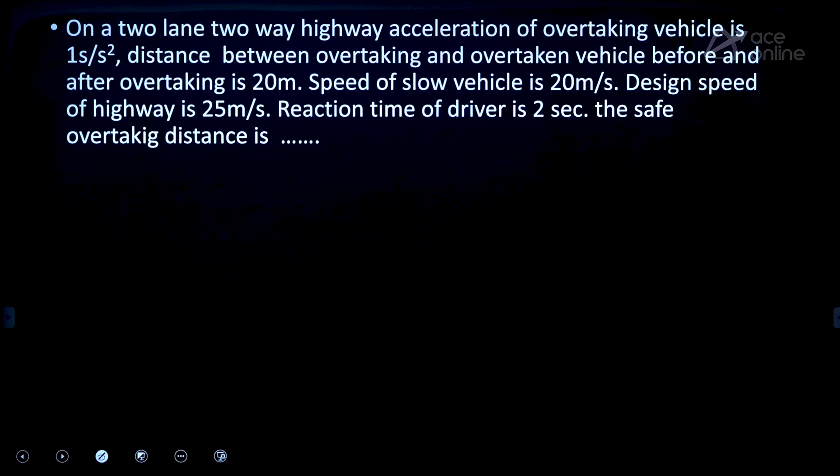The safe overtaking sight distance is what they are asking. Acceleration is given to us - this is acceleration. S1 plus S2 is equal, S1 and S2 will be equal to 20 meter. The speed of the slow vehicle is VB, and design speed of opposite vehicle is V. Driver reaction time for OSD is 2 seconds. First you calculate overtaking time, under root of 2 into S1 plus S2 by A. A is 1, so 2 into 20 plus 20, 40 into 2.

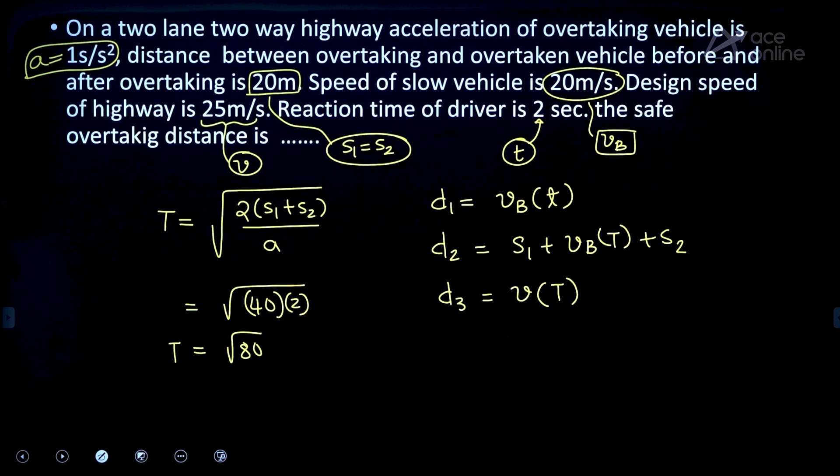So VB is 20 into 2, this is small v - 25 into capital T you need to take. So safe OSD on two-lane two-way traffic will be, two-lane two-way, D1 plus D2 plus D3.